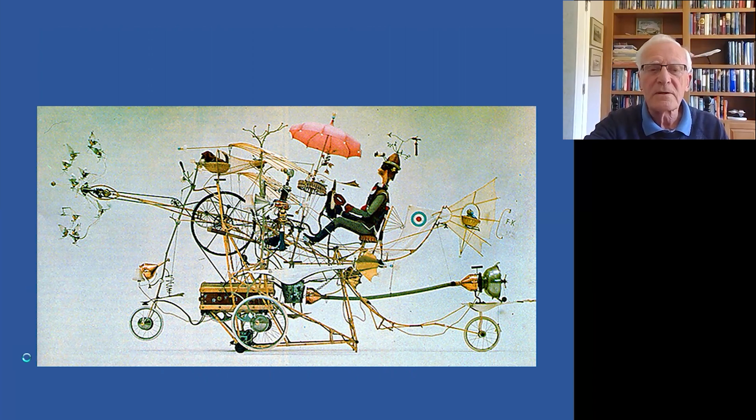In this particular case, we look at the various ideas that were put about to support these racing airplanes. This is one idea of a racing airplane for a gentleman. With all of these airplanes, it has an engine, it has a propeller, and it has an exhaust system.

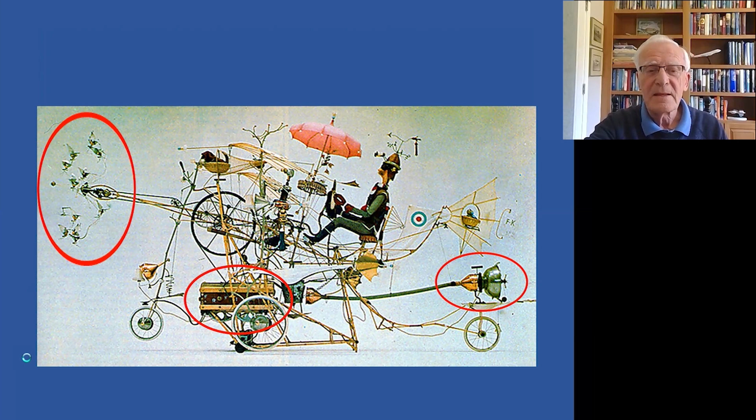The main components of any major propelling device. This particular thing was done by an artist in Europe, and he built this thing full size, working. Obviously it didn't fly, but it did move, and it was exhibited throughout the 40s or 50s and 60s, certainly. However, it does make the point.

What I'd like to do is first look at some fundamentals about the kind of thing that came together for this race era, look at some trends, and then, after we do some basic understanding, get into how these things came about.

First thing, of course, was the businessmen who wanted to support efforts to keep their circulation in the case of the newspaper owners. They were looking at events they could put on for the public. Therefore, most of the racing airplanes were what I'll call point design, meaning they were very fast for the spectacle that went with that. They were all at sea level or very close to sea level, both on land and on water.

Of course, the first thing the engine designers had to worry about was really creating power. This particular chart shows a four-stroke engine and some of the factors that affect the power. All of the engines we're going to talk about today are going to be operating on the Otto cycle, or the four-stroke cycle.

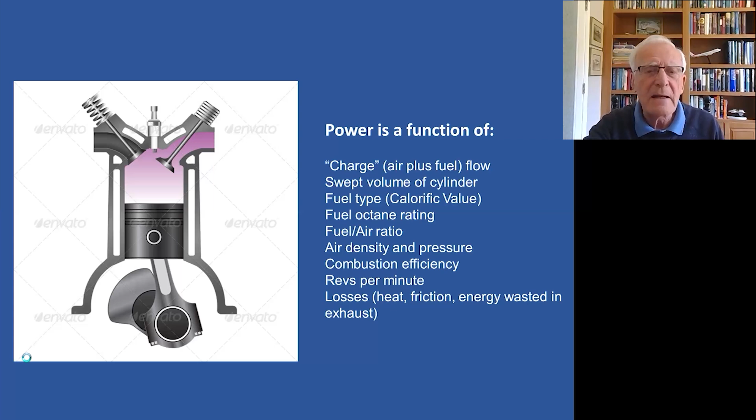That's kind of the fundamentals of how the engine operates to generate power. But the purpose of generating power is really to create thrust that will move an airplane through the atmosphere.

This chart shows the process of taking the fuel and the air - recognize that the hydrocarbon fuel won't burn by itself. It needs to be vaporized with air, and that fuel-air mixture will then burn. So we go through a combustion process converting the chemical energy in the fuel and the air into heat energy. That heat energy is applied to the pistons within an engine, and through a series of cranks produces mechanical energy. That mechanical energy is typically how we measure the power of an engine.

But that's not much use to an airplane until we convert that into propulsive energy. In the same way that the combustion process doesn't capture all of the heat available from the chemical energy in the fuel, each of those conversion processes operates at an efficiency of less than 100%. The combustion process is probably the biggest loss process going, but all those other conversions also have a price to pay. In creating maximum power, you want to minimize the amount of wasted energy.

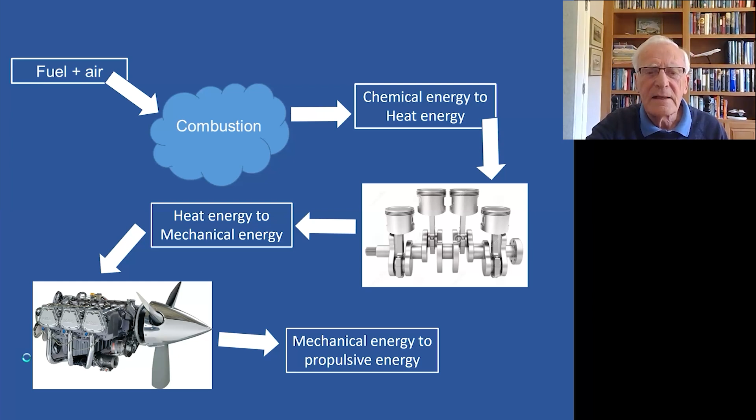So given that, let's take a look at some trends. I've got a couple of charts here taken from a book called Race with the Wind, which describes the history of many of the racing airplanes used during the 20s and 30s. This chart shows that back in 1920, where this chart starts, racing airplanes were probably flying at a speed of roughly 190 miles an hour, faster than the fighter airplanes of the day, right after World War I.

Although this chart shows a straight line characterizing the racing engines, it normalizes the data that's available. However, the time it takes to get from an airplane or an engine operating at 200 miles an hour to operating in a fighter airplane in a practical military environment took, in this case, between 1920 and 1930. In other words, the application of technology from the racing airplane into a practical military airplane proceeded at the speed of metallurgical development and manufacturing development, really - and that took a long time back in 1920.

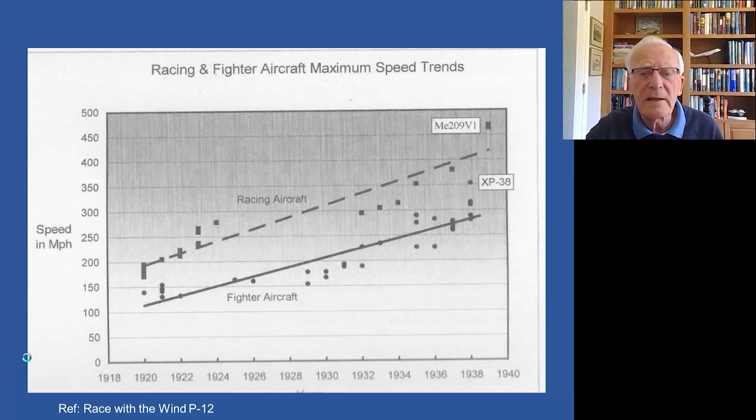The Thompson Trophy airplanes - the Thompson Trophy was part of the national racing calendar, but this is beyond the end of the 1920s. The Thompson Trophy race was primarily a short circuit pylon race, which nevertheless involved some high technology racing airplanes. But in this case, we're only looking at a difference in speed of roughly 40 miles per hour between military airplanes and the Thompson Trophy winners, and the time to get the same airspeed out of the military airplanes compared to the racing airplanes took something like about 4 years.

I think this recognizes the fact that by the 1930s, metallurgical research and manufacturing processes had advanced sufficiently that it took less time to exercise the technology developed in the racing airplane. However, the point is that it takes time, and you're looking at all these racing airplanes as point designs, near sea level, built for as high a speed as we can possibly squeeze out of it.

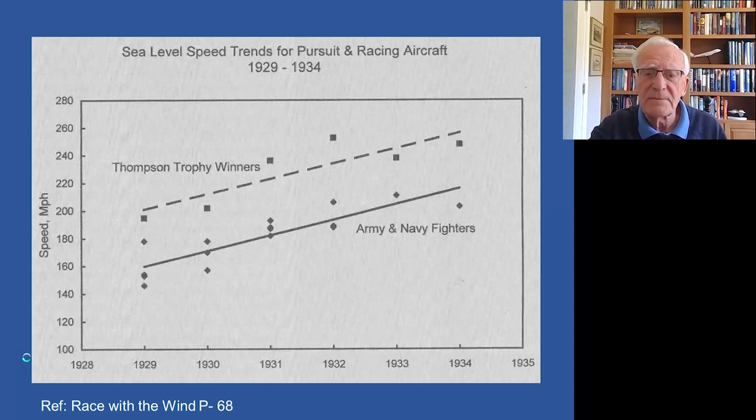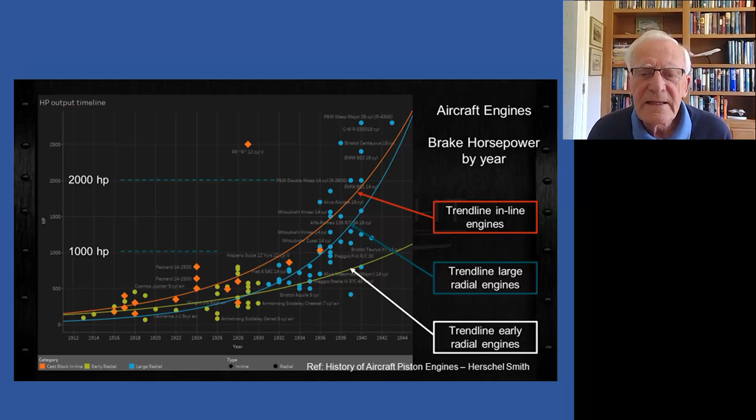However, by 1929, where the blue line and the green line intersect, radial engines were better understood and allowed further development of the compression in those engines. That was also the start of the ability of an engine to be supercharged, and that allowed all those blue points to take off literally like rockets in later years, getting up towards World War II. But we'll talk about that as we go through here.

So, okay, that's horsepower development. Let's take a look at the next chart, which is a similar chart of horsepower per cubic inch—in other words, how much can I get out of a given capacity of engine. And that had a lot to do with the way you grow an engine.

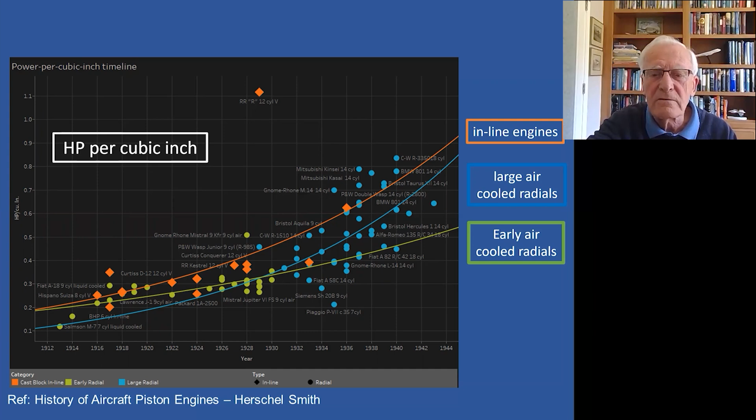Likewise, power to weight ratio shows a distinct advantage for the inline engine. Now, you'd think an inline engine with a water cooling system would be a lot heavier than a radial engine, and in terms of the dry capability of the engines, that's not far off. But in order to create a high horsepower per pound ratio, you need to run an engine at high RPM.

One of the inline engine advantages was that you could put a double set of valves in a cylinder. With a radial engine, you couldn't do that as easily. So if you only had 2 valves in the cylinder, you had to make them bigger and open further to absorb the capacity, or the air fuel charge pushing through the engine. When you ran that at very high speed, you had more valve inertia, which created valve bounce, and it also meant you had to allow space to open those valves before they hit the piston. That was the disadvantage for the air-cooled engine, so there was a very distinct advantage there for the inline engines.

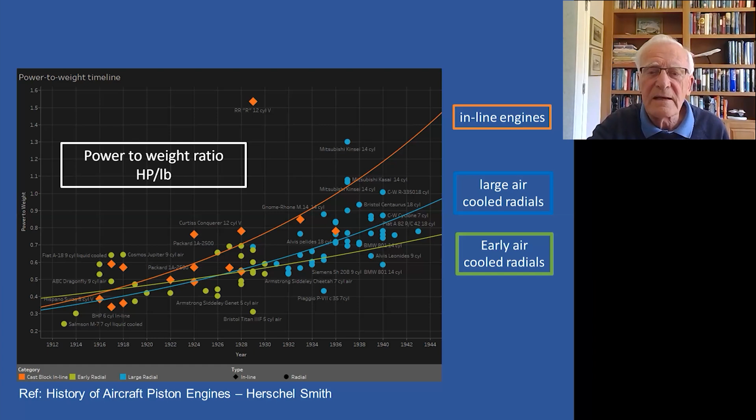Here's just a summary of it, if you like, and there's one more point I want to raise in this chart. During World War I, several inline water-cooled engines were prevalent: Hispano-Suiza being one of the major ones, a V8; the Hall-Scott engines that we'll talk about in a second; the Packard engine; the Liberty; and the Curtiss inline engines created by Glenn Curtiss.

One of the things all of these designers ran into immediately was the square cube law, where the heat generated by burning the fuel in a cylinder was proportional to the cubic power of the cylinder dimension, the bore or the stroke. What that amounted to was a recognition that the amount of surface area available for either water cooling or later air cooling was a function of the square of that same dimension. So as you get bigger in capacity of the engine or cylinder, there's less efficient or less space available to cool the engine. So the way to increase capacity and power was to have more cylinders rather than bigger cylinders, and we'll get into that as we go through to see some of the development.

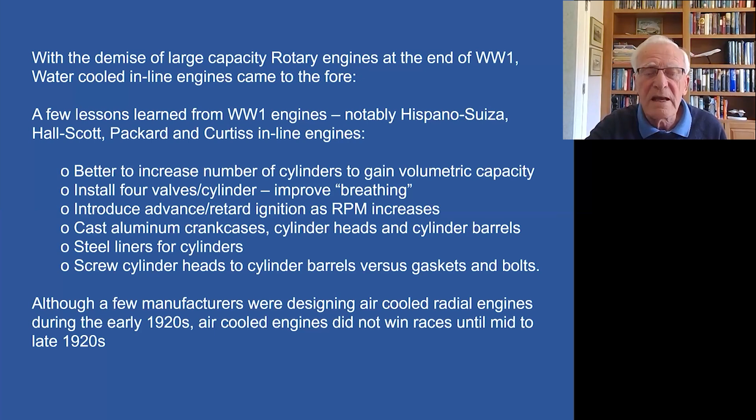So let's take a look at a couple of people involved in that. Hall-Scott was a well-known company that designed engines for all sorts of applications, and you see one of their straight 4-cylinder engines here with an overhead camshaft and overhead valves, which meant the engine was a lot lighter. Elbert Hall, who was the engineer of the company, did a lot of research into the shape of the combustion chamber to make the combustion more efficient.

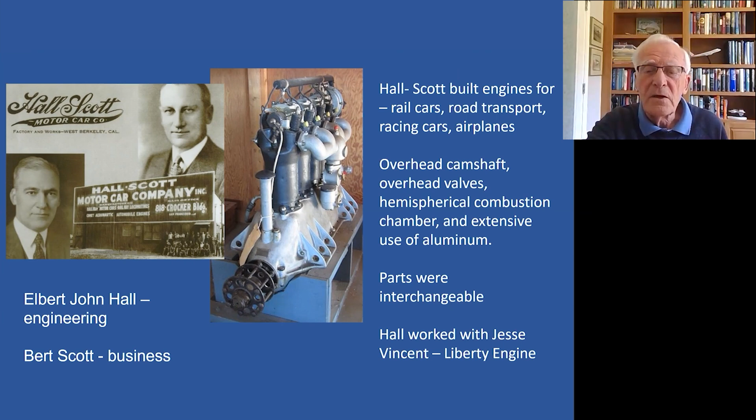He pioneered the extensive use of aluminum here, and the key to the whole thing was that these engines had parts that were interchangeable, a characteristic of the American industry, as opposed to the European industries that took pride in more hand-built engines. It was Elbert Hall who worked with Jesse Vincent, this next man.

Jesse Vincent was the chief engineer of Packard for many years, and he was a self-educated guy, really. He educated himself in the engineering world through all sorts of communications and postal systems, the communication media that was used to educate in those days.

He came across, or came upon, his natural instinct for engineering quite because of his breeding. His father was the chief engineer of the Union Railroad system during the American Civil War. A lot of that, I think it was Jesse Vincent created his first engineering application by sharpening tools and got in as a very young kid, really as still a young student who got stuck into replacing and servicing various tools.

For lathes and chisels and this kind of thing early on in life. And so he came across his engineering education quite early. He also got into the habit, working for the Packard company, of exercising a lot of his ideas in racing cars before he put them into aircraft engines.

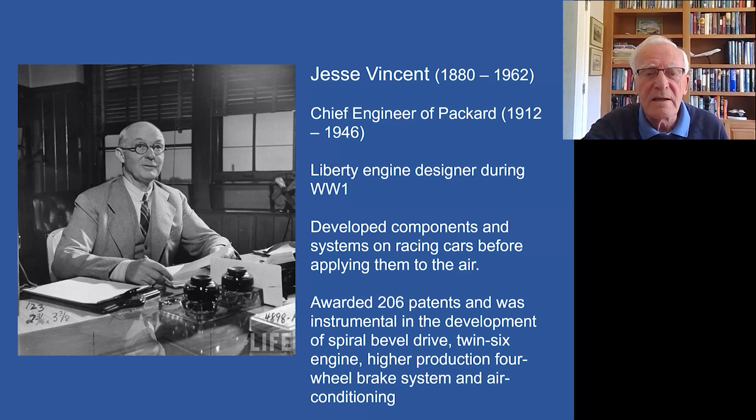But his real claim to fame early on, when it came to the period immediately or during World War I and immediately afterwards, was in developing this engine, the Liberty engine.

When the United States got involved in World War I in April of 1917, Woodrow Wilson made some very ambitious targets for applying the ability of American industry to producing power plants for the war effort. And he designated Jesse Vincent as the guy that he would like to head up the team to develop power plants for First World War application.

Jesse Vincent immediately got a hold of Elbert Hall from Hall-Scott, and the two of them put their heads together. They said, look, there's a lot of engines available worldwide that we could use. However, I think we should take a look at best practices of all the engines that we know about in the world. We should plagiarize unmercifully, which they did, ideas from all of these engines and put together our thoughts on a new engine.

Within 6 weeks of the assignment from Woodrow Wilson, they put together an operational L8 engine, a V8, 45-degree V8 engine. And it was Jack Pershing, General Jack Pershing, who commanded the United States forces during World War I, who came along to him and said, guys, I need more power than that, make it a V12. They did just that, and this was the result.

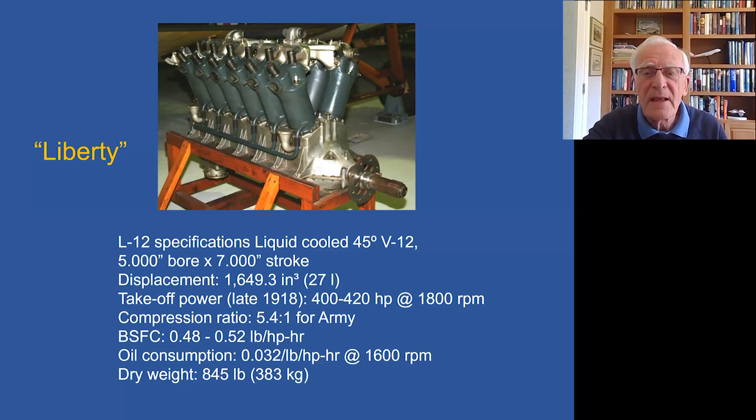Nominally 400 horsepower, 5-inch bore, 7-inch stroke, and the engine looks like a piece of active machinery. Here's the development of that engine.

After World War I, a lot of the original racing venues got started up again. And one of those was the Pulitzer race, which involved, really this was kind of the start of the national air races after World War I. And in the case of the 1920 Pulitzer race, the airplane that's up there in the top picture is a Verville-Packard R-1, designed by a little airplane company called Verville, which operated out of Detroit, and it used a Packard engine.

And it was a development of the Liberty engine, shown in that left-hand picture there, which is a 638 horsepower version, a development of the Liberty. I said the Liberty was about a 400 horsepower engine, and this was just a little bit of a growth to that, and was one of those early standout engines, the 1A2500, which appeared in those early trend charts.

This allowed that Verville-Packard airplane to fly at 178 miles an hour during that 1920 Pulitzer race. And it was flown by an Army lieutenant shown on the right, called Moseley. Moseley not only was a very active Army officer, he was also later on a vice president of Curtiss-Wright, looking after a lot of the airport activity that went along with Curtiss-Wright. He was the vice president of that company. And he was also quite active in the start of US airlines on the West Coast, particularly of the United States.

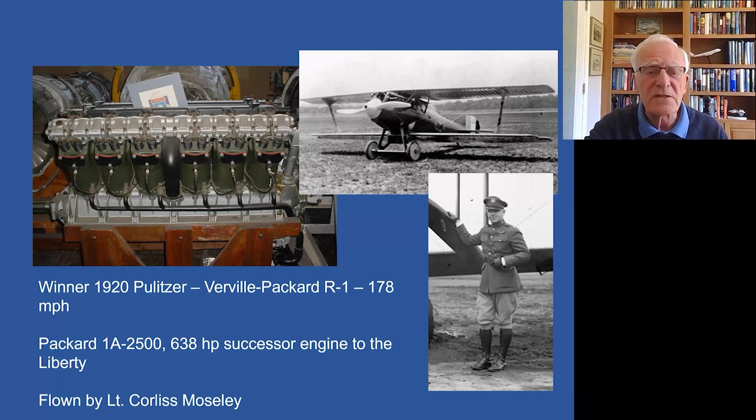In 1907, he got that first V8 motorcycle engine. And you can imagine what a V8 motorcycle engine was slung underneath the frame of a motorbike. And he created a record which stood for many, many years in terms of speed record for motorcycles. In 1915, he developed the famous OX5 V8 water-cooled engine, and probably the best-known application of that was in the JN4 Curtiss Jenny during World War I.

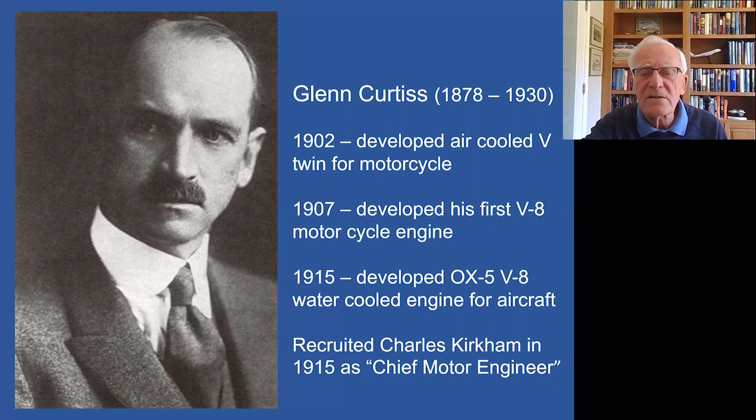In 1915, Curtiss came across a guy called Charles Kirkham and pulled him into the Curtiss operation as chief motor engineer. Charles Kirkham understood the ideas that Curtiss had himself about developing an effective water-cooled V12 engine.

The only problem with the engine that Curtiss and Kirkham put together was that it was a 400 horsepower V12 engine, and it had to make an inroad into the marketplace in spite of the Liberty engine, which was already adopted by the United States government as the standard power plant used for all applications in World War I.

However, during the short time Kirkham was involved with Curtiss, only a couple of years, he developed the cast aluminum crankcase ability, putting integral cylinder blocks into that casting. He also recognized the value of 4 valves per cylinder, and developed what's called a wet sleeve, meaning the water cooling was in direct contact with the steel liner in the cylinder for more effective cooling.

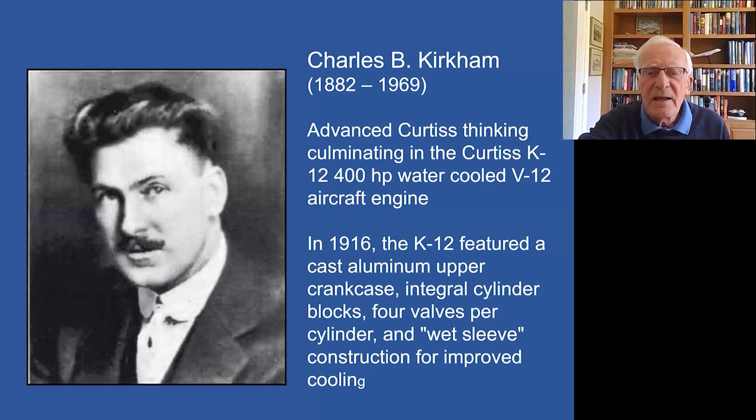He developed this engine, the K12, nominally 400 horsepower, which became, after a few years, the C12, adopted by Curtiss, because Kirkham left the Curtiss company and went off to set up his own. We shall see a little more of that later on.

But Kirkham, while still working on the C12, started working on the science of propeller reduction gear, recognizing the engine ran at an RPM more efficient than a propeller could operate because of the limits of the tip speed of a prop. He developed some propeller reduction gears but had problems with them early on.

After Kirkham left the company, Curtiss went to a version of this V12 engine called the CD12, which was a direct drive version of the C-12 engine. Further development and refinement went on to a final version of this engine, called the D-12.

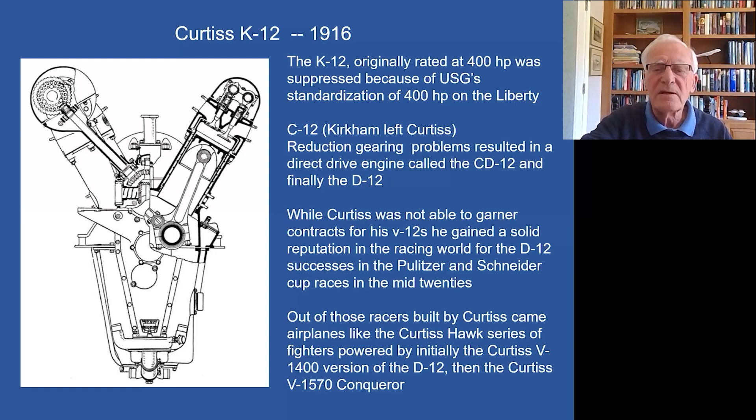This was where Curtiss, not being able to get involved in standard competition with the 400 horsepower Liberty engine, concentrated on focusing his attention on the racing circuits, both on land and sea, as we'll see in a minute. He also started working with the military to overcome the competition with the Liberty engine, applying his engines to military fighters, which we'll see with the next chart.

It's just a cross-section, fore and aft, of the D-12 engine.

Right at the beginning of the 1920s, Glenn Curtiss got together with a Texas millionaire, a man called Sam Cox. Curtiss started not only experimenting with engines but also with airplanes, for the 1920 Gordon Bennett race and several other race applications, including Pulitzer.

What we see here are a couple of those versions Sam called the Texas Wildcat and the Cactus Kitten. The first one at the top was a high-wing monoplane with a closed cockpit, and those squares and oblongs on the side are actually the heat exchangers, or radiators, for cooling the liquid from the C-12 engine up front.

For the 1920 Bennett race, he had an airplane that was a biplane, and then ultimately for the 1921 Pulitzer race, an open cockpit triplane, which was the one that really took his fancy in the end. Curtiss was really beginning to feel his feet here in terms of racing and looking at both land airplanes and seaplanes, which we'll see in a second.

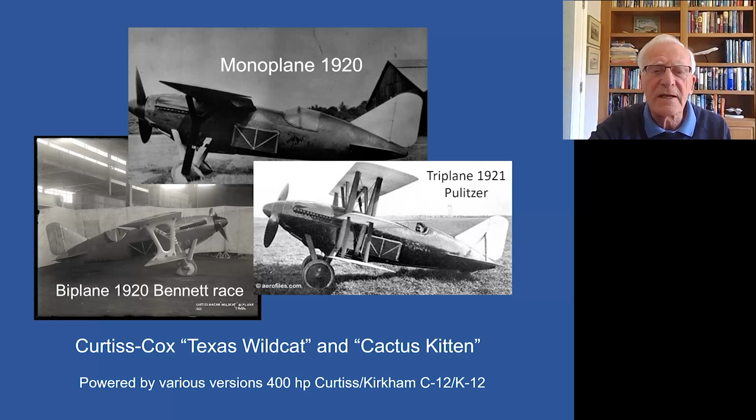In 1920, one of the races involved, as well as the Gordon Bennett race, was the race by the newspaper owner Pulitzer. He got Curtiss to put together his CR-1 airplane, seen here on the left, for the 1921 race. The airplane was borrowed from the Navy but used by Curtiss, and it was his chief test pilot, Bert Acosta, who flew that airplane and won the 1921 Pulitzer race.

In 1922, Verville was still active. In this case, they used a smaller monoplane, seen at the top of this picture, for the 1922 race, which used a V8 Wright engine as the power plant, making it a much smaller airplane.

That won the 1922 race. It was developed by McCook Field, which is really the early days of Wright-Patterson, and a lot of very prominent engineers in the engine and airplane business were working out of McCook Field in the beginning of the 20s.

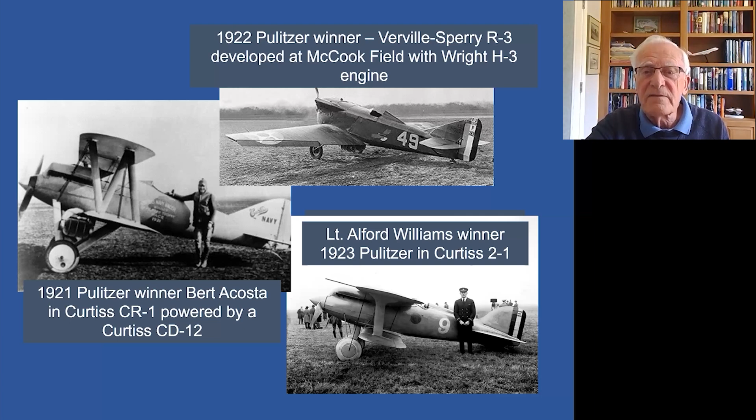So you see here, Curtiss is really spreading his wings in more ways than one in this whole business. Let me just go back here. Bert Acosta's airplane here and the Verville airplane up there used an advance in coolers called the Lamblin radiators.

These were colloquially known as the lobster pots, developed by the French in 1918. These circular coolers were slung under the airplane, as you see here, and inside they had annular tubes that carried the coolant, with plates on those tubes that supplied air cooling for the coolant. This was reputed to have added 15-odd miles an hour to some of the first airplanes they tried it on, and it was used as a development to improve airplane and engine performance.

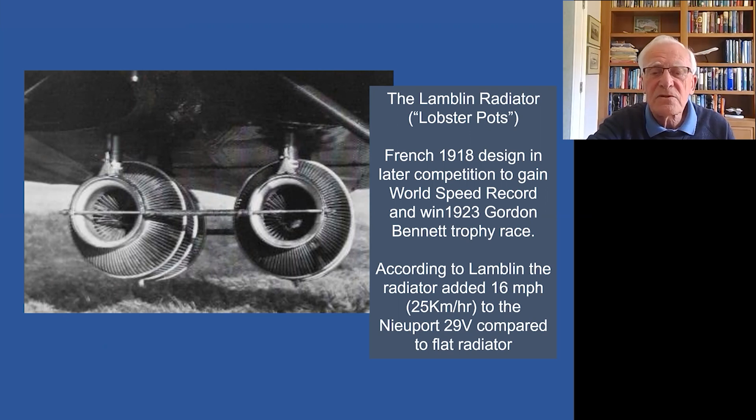It was just a precursor really to this idea, which was Curtiss's designed surface radiator that he used for the Schneider Trophy races, as well as that Williams racing airplane I just showed you. These are really brass tubes carrying coolant, which are really the kind of grandfather of the plate fin coolers we used many years later.

The same kind of idea was being developed at Supermarine with R.J. Mitchell, and he was putting these kinds of coolers right down the side of the fuselage of the Schneider Trophy airplanes in '29 and '31, whereas Curtiss here was using them as a wing surface, both of which were very effective as coolers.

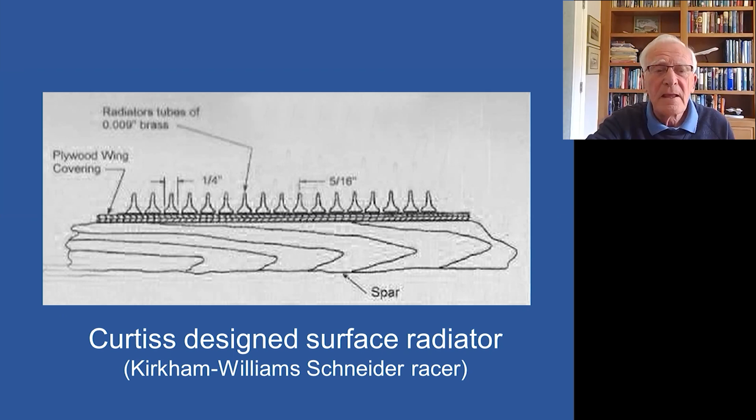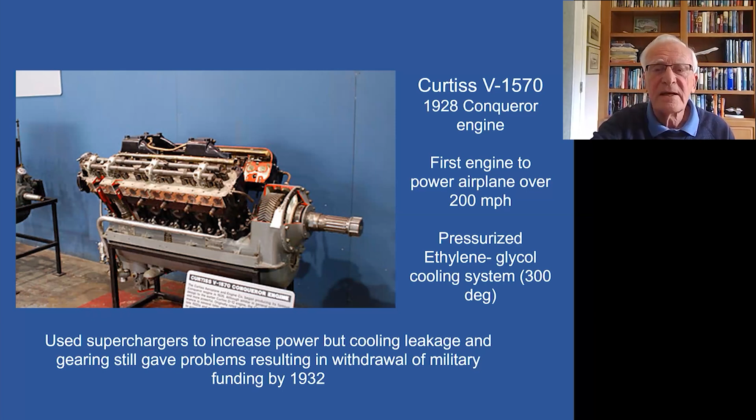It produced more than 600 horsepower, and it powered this airplane here. Finally, Curtiss broke through with the military, and this engine, the Curtiss Hawk Fighter, was initially supplied with a...

V1400, which was a 500 horsepower version of the Curtiss engine. Remember, originally his engine here was the D12, producing 400 horsepower. The V1400, 1400 cubic inch capacity, gave about 500 horsepower, and then the Conqueror, a 1570 cubic inch engine, supplied 600 horsepower.

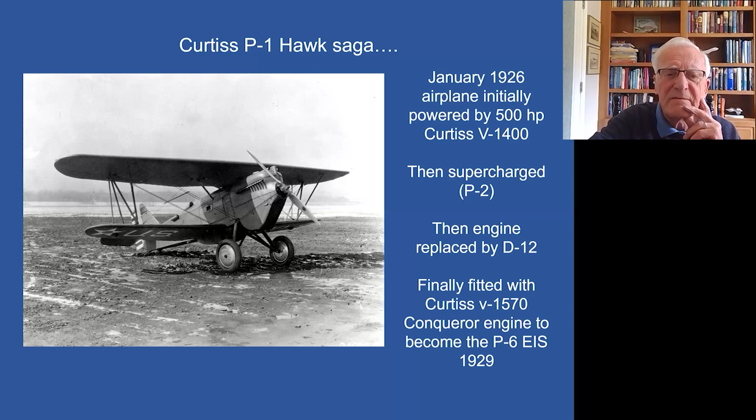Then they replaced the engine with a basic D1200 or D12 with a geared prop. Finally, they fitted the 600-plus horsepower Conqueror, and that became the P6 version of this Hawk airplane. It was used in service from 1929, but it was pulled during the early to mid 1930s, and that engine kind of disappeared at that point, at least in service.

I should mention here that after Kirkham left Curtiss, the man who picked up the development work was Arthur Nutt. Arthur Nutt was involved in the development of the CD12, the D12 itself, the V1400, and finally the Conqueror, the 1570 engine.

After the Curtiss-Wright Corporation was formed, he became Vice President of Engineering for the next 14 years, and was also a director of the Packard Company from '44 to '49, and then went on to produce his own company from '49 to '51. You could argue he couldn't hold a job down, but he did a tremendous job in every company he worked for throughout his career.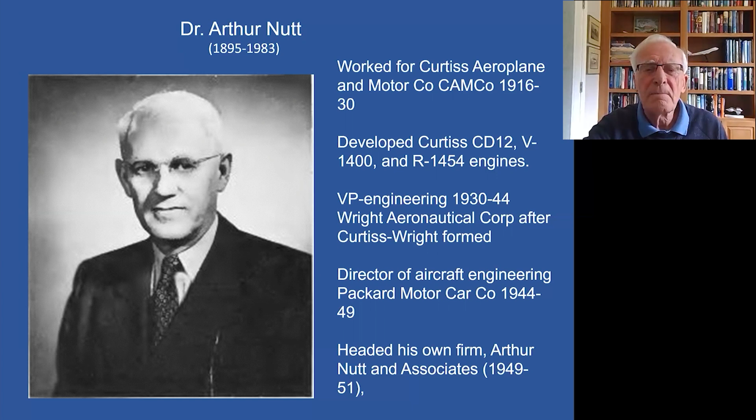Now let's talk about the Wright Company for a minute, because I find there's quite a bit of confusion usually about the Wright Company and how it developed. This chart attempts to summarize that. The original company, of course, was formed by the Wright brothers back in 1903.

In 1916, it merged with the Glenn Martin Company, and they had a license to build Hispano-Suiza V8 liquid-cooled engines for the services. In 1919, at the end of the war, Martin backed out of that, and the company became known as Wright Aeronautical Corporation. In 1923, a man called Charles Lawrance, who we'll see in a minute, developed an air-cooled radial engine.

Wright Aeronautical had real ambitions to get into the air-cooled radial engine, particularly since the Navy was averse to liquid-cooled engines because of their complexity and compromised ability to be maintained at sea on a naval application. So Lawrance produced a 200 horsepower engine back in early 1921.

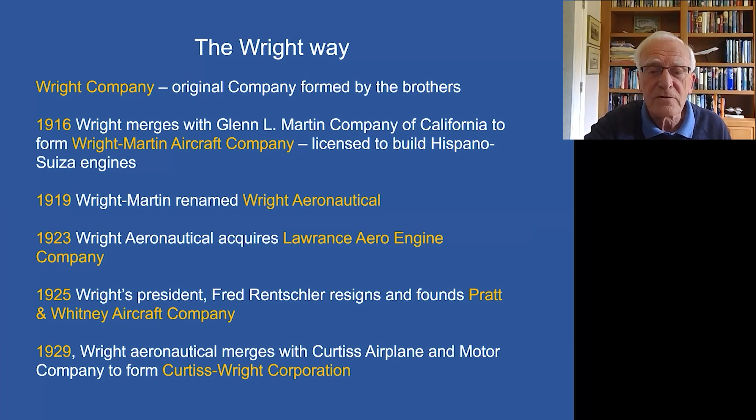In 1929, Wright Aeronautical, involving Lawrance as well, merged with Curtiss, and that was the origin of Curtiss-Wright Corporation. So that's the development of Curtiss-Wright. It's their air-cooled radials that we'll hear a lot more about as we move through the 30s and into the 40s, and they were, of course, in competition with Fred Rentschler at Pratt & Whitney, but we'll cover that in a moment.

Fred Rentschler, although he had his own ideas about air-cooled radials, had a kind of jaundiced view of his board of directors at Wright Aeronautical. Many of them, in fact all of them, were non-aeronautical types, non-engineering folks. They were mainly finance guys. Fred considered that they weren't adept enough at getting air-cooled radial engines to the right place in the market. At the end of 1924, he resigned.

The ideas he had on air-cooled radials were shared in depth by George Mead and Andy Willgoos, and they produced this engine, the 1340 cubic inch Wasp engine. Fred Rentschler had told his staff, which was fairly small - and by the way, they started designing this engine in Andy Willgoos's garage. We think all our modern inventions started out in garages, a lot of the software business and computer business starts out in garages. Well, this engine was one of the first to start out in a garage.

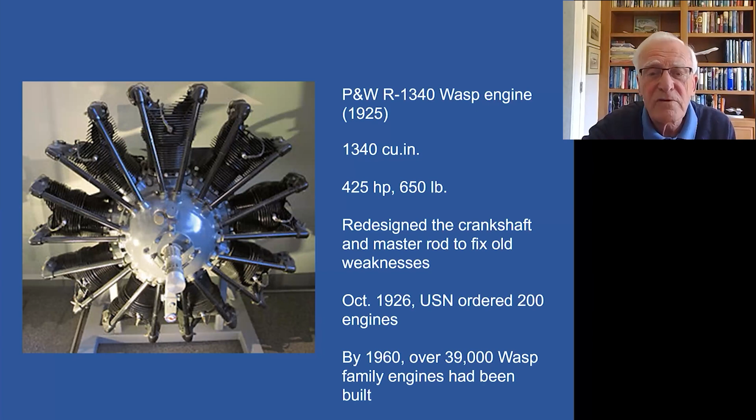But it was obvious right off the bat that instead of a 400 plus horsepower engine, a smaller engine was needed, and this engine was developed. It was a scaled down version of the Wasp, and in 1930 became known on the marketplace as a 985 cubic inch engine, the Wasp Junior. Nominally 300 horsepower, but for a point-designed airplane, it could be boosted considerably.

Matty Laird used it in the first 1930 Thompson Trophy race around the pylons when it was rated at 470. Now, Matty Laird used that, but the race itself was won by a man called Speed Holman, who was famous on the racing circuit, using an airplane known as the New Solution, which was a Travel Air airplane.

Holman himself was killed a couple of years later because he flew everything. He came across his nickname of Speed Holman quite honestly, and he was involved in some very, very fast, low-level airplanes doing violent maneuvers low down in the Thompson races. It was this airplane that became Speed Holman's demise in the end.

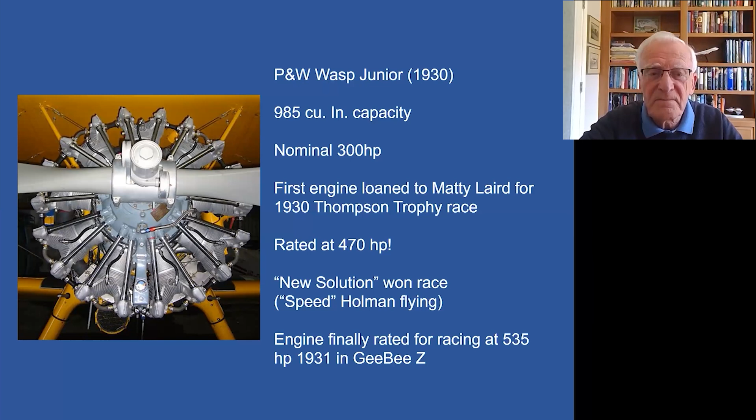But that's another story - what happened at Wright? Well, in 1921, Wright Aeronautical had taken this man on, Sam Heron. Sam was a Brit engineer who'd worked at the RAE at Farnborough in Britain, and he'd worked with a man called Professor Gibson, and the pair of them had spent a very great deal of time and effort trying to understand air cooling.

Particularly the science involved in exhaust valves, which I think it was Stanley Hooker at Rolls-Royce who said that some engines were specifically designed as destruction mechanisms for exhaust valves. And it was Sam Heron who came across the idea of lining an exhaust valve, which he patented, with sodium.

He tried various metals, but the idea was to use the latent heat required to change a solid into a liquid as a cooling mechanism inside a valve. It was Sam Heron who exercised that idea to begin with and really advanced the technology considerably. You see a few of his exhaust valve ideas there on the top right.

He also got involved in trying to increase the compression ratio of engines by becoming interested in the science of tetraethyl lead, which opened the door to high octane fuels that could take higher pressures than the nominal 6-to-1 compression ratio most engines had in those days. He became director of research at the Ethyl Corporation, the company put together to produce and market tetraethyl lead for increasing the octane number of fuel.

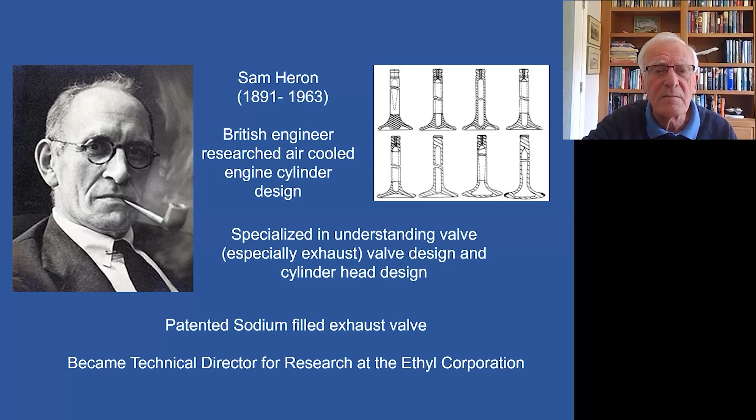Here's a cross-section of the Heron-Gibson, Professor Gibson back at the RAE at Farnborough. This was when Sam Heron was playing around with mercury-filled exhaust valves. They found sodium was better, but he was doing a lot of research with Gibson on the shape, size, and location of air-cooled fins on the engine cylinder barrels, and how to put steel liners inside the cylinder head by screwing them in instead of shrinking them in, in many cases. He was also working on valve shapes and valve guides to keep these things as efficient as possible.

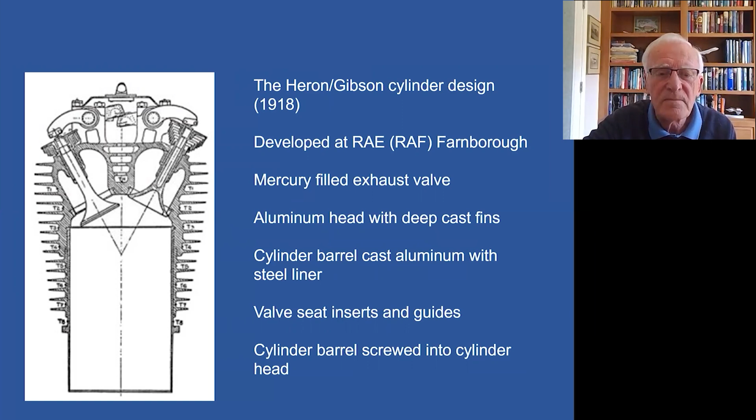The first engine produced from the marriage of Charles Lawrence and Wright Aeronautical was called the J1, a 200 horsepower 9-cylinder engine. George Mead and Fred Rentschler did some of the development work along with Sam Heron on the J1 and J2 engines. But then Fred Rentschler and George Mead left Wright, and it was left to Sam Heron, Arthur Nutt, and others to develop this series of engines.

Over several years this engine became known as the Whirlwind, developing as a 9-cylinder air-cooled radial in direct competition with Pratt & Whitney. By the time it got to the J5 version, that was the engine used by Charles Lindbergh in the Spirit of St. Louis to fly across the Atlantic in 1927.

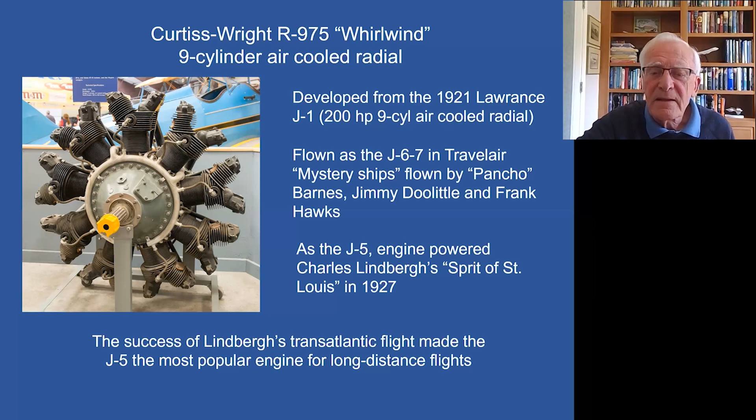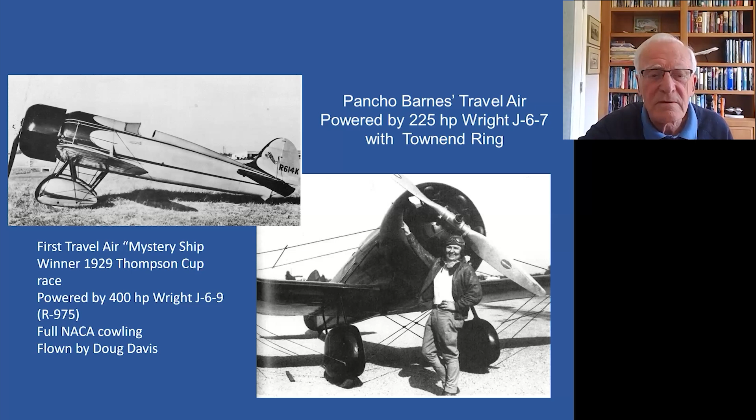...radial shutters, if you like, and doors in this gap to allow a lot of cooling air to flow through the inside of the cowl for takeoff and high power operation of the engine. Then at cruise, where you didn't need so much cooling, you could close it off and get rid of the drag effect of those cooling doors. That full cowling was used first in the 1929 race that you see there.

Okay, let's talk about some of the other things that happened with the advance that took place in 1929, beyond what we've seen so far. Pretty well all the engines we've talked about so far, in Europe as well as the United States, ran about 6-to-1 compression ratio, because beyond that you ran into a problem called knocking or pinking.

Let's talk about that for a minute. As I said earlier, the gasoline fuel needed to be vaporized with air for efficient combustion. In the engine, the separation between the burning gases and the unburned fuel-air mixture is called the flame front, which moves through the cylinder as the mixture is compressed. After the spark plug initiates combustion, the air-fuel mixture ahead of the flame front is compressed because the burning gases are expanding, compressing the unburned mixture ahead of it.

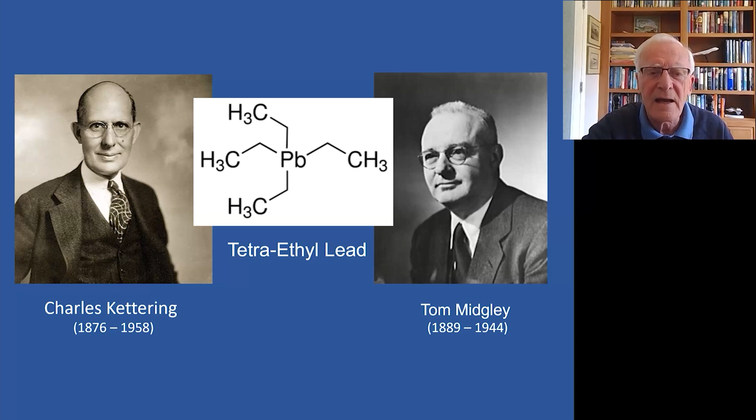That increased the charge weight of air and fuel we mentioned earlier in developing power, significantly increasing as you increase the pressure of the air involved with the fuel. It was Moss who ultimately developed the exhaust supercharger, recognizing the waste heat going out through the exhaust pipe, famously developed in later years for applications in military airplanes during World War II. But that's another story.

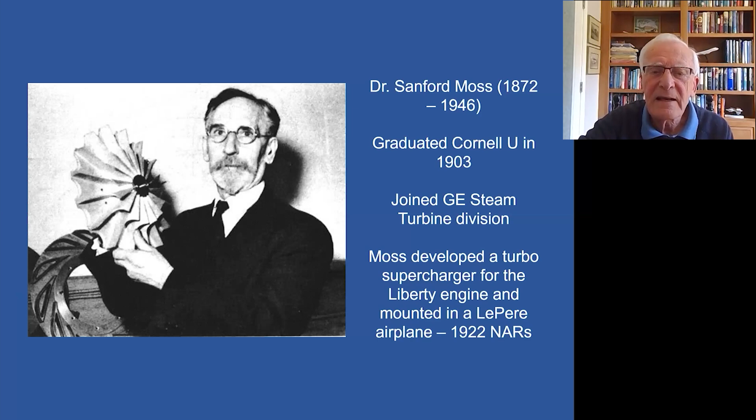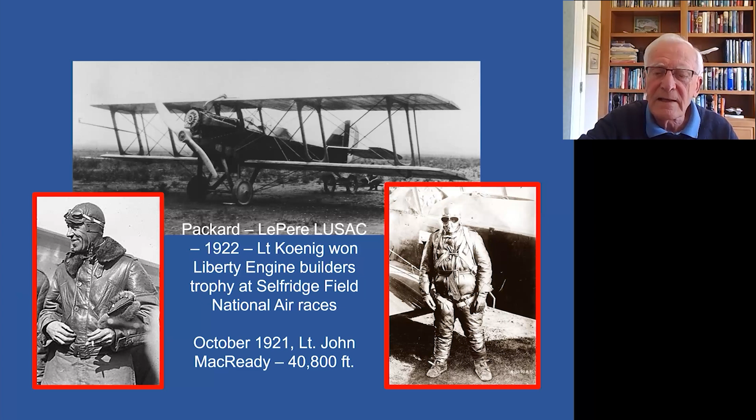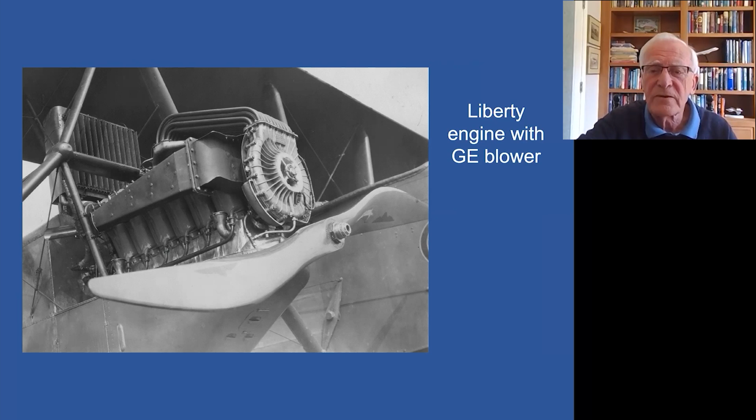But nevertheless, it worked, with a fixed pitch propeller, of course. And it was at this time that you saw the power increase.

This is where, if you remember back on those trend charts we had initially, in 1929, the air-cooled radial engine took off in terms of power capability. That was where the run-up to World War II had that total development of high-powered air-cooled engines, all due first of all to the introduction of high-octane fuel, but then also to this introduction, which was the variable speed or variable pitch propeller.

It was developed in various places concurrently, really. The initial patent for a constant speed propeller, which was one that allowed the engine to run at a constant speed, whereas the speed of the propeller was constant, but it changed pitch as the power requirement changed as you got to higher and lower altitudes.

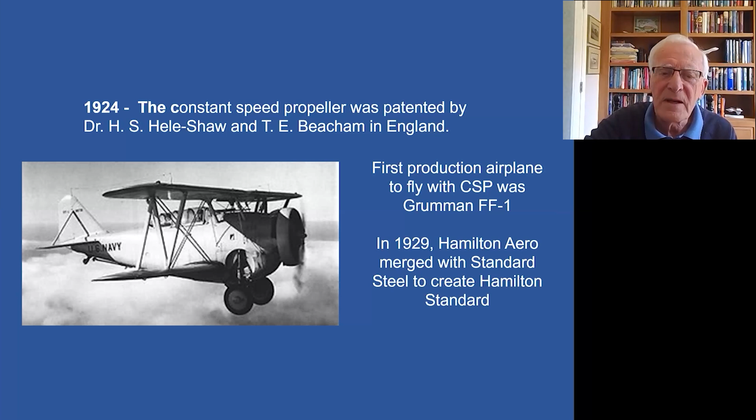Just coincidentally, later on in the 20s, in 1929, Hamilton Aero, as it was known then, merged with Standard Steel Company, and that created Hamilton Standard, who became really the number one United States producer of variable pitch propellers.

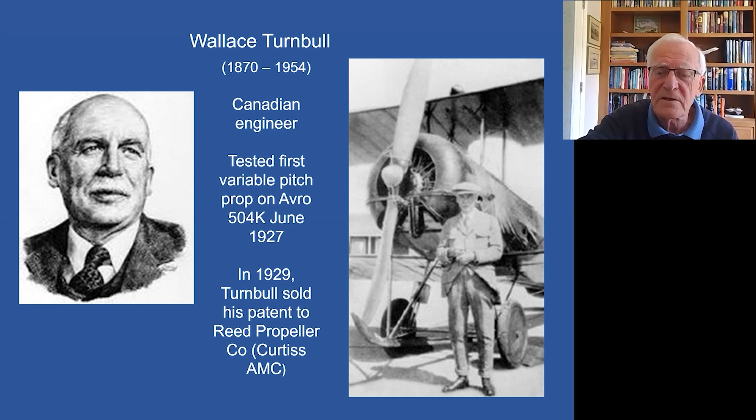He also then sold all of the patents that went with that to a part of the Curtiss company later on in 1929. The man who really developed the technology here at Hamilton Standard was Frank Caldwell. Caldwell developed the controllable pitch prop, and he developed it hydromechanically

for two of the first two airliners, the Boeing 247 and the DC-2. That's what Hamilton Standard called gear shift in the air, really, and that was used by some of the racing pilots to improve the performance during the racing process, too.

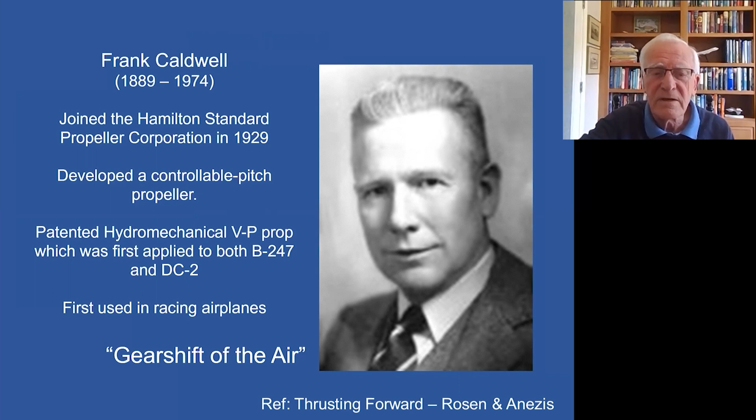So here we see how some of those racing engines from the Wright company and from the Pratt & Whitney company serviced the airplanes that we've used during World War II and in the commercial market also at all levels.

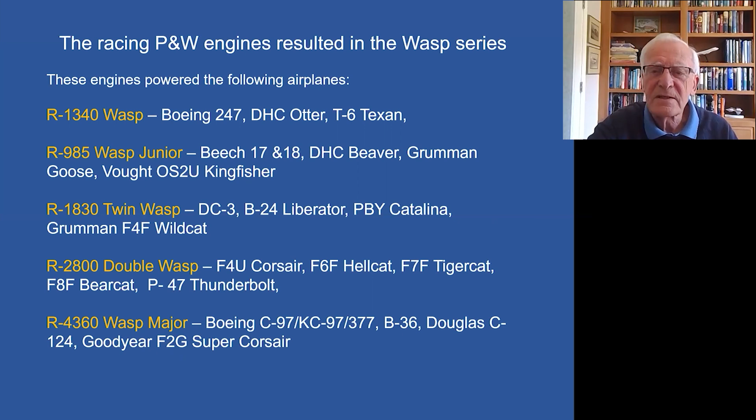But you also see airplanes, or engines, that are still around for many of the airplanes that we see in museums today. And several of those airplanes you will see with those engines in the Historic Flight Foundation collection.

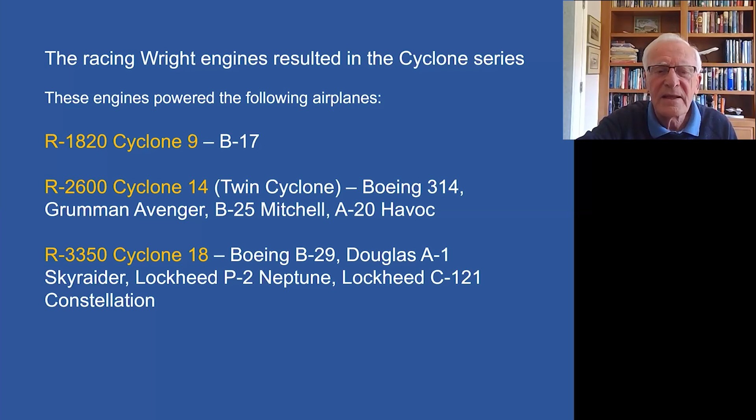And just a small postscript to this: in 2016, just before we actually produced this story originally, in 2017, ASME designated the R1340 WASP engine as a historical engineering landmark, absolutely establishing its position as a landmark in technical excellence and technical significance, both in engineering and aviation.